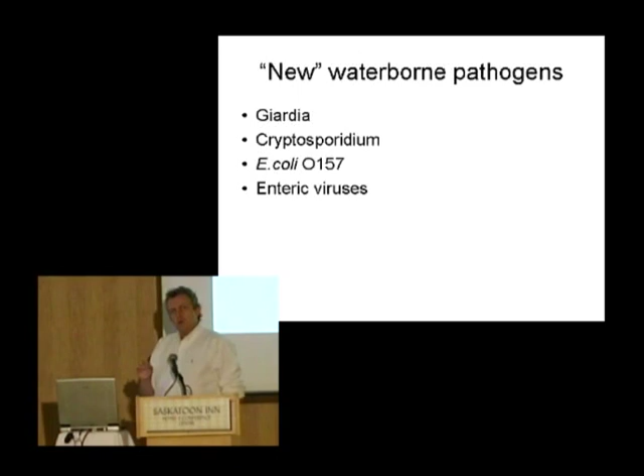And trying to find methods of treating drinking water targeted at specific organisms is a crazy idea. It makes no sense at all. Hopefully, by the end of this presentation, you'll have a bit more of an idea why I'm saying that. But it's true that targeting specific organisms is not a smart way of spending your money. Consequently, monitoring for specific organisms is not a good investment, generally.

We're all familiar with the concept of indicator organisms. This concept goes back a long way, to when doing any kind of microbiology on water was pretty difficult. The idea was to pick a group of organisms, or preferably a single organism, that can be used to indicate the potential presence of enteric pathogens. When this concept was developed, the enteric pathogens we were talking about were things like Vibrio cholerae, Shigella, and Salmonella.

And initially it was coliforms. They were the initial indicator organisms. Well, I guess in truth, initially it was just total bacteria, but that's not a very good indicator. And then we moved to coliforms, which are also not a particularly good indicator of fecal contamination.

So some smart cookie came up with the concept of a subset of coliforms known as fecal coliforms. Well, by the end, or a little way further into this presentation, you'll probably get the impression that I don't really agree with the concept of fecal coliforms, because there is only one fecal coliform, and that's E. coli. And that's a specific organism, very well defined, both in the way that it behaves when you grow it, but also genetically.

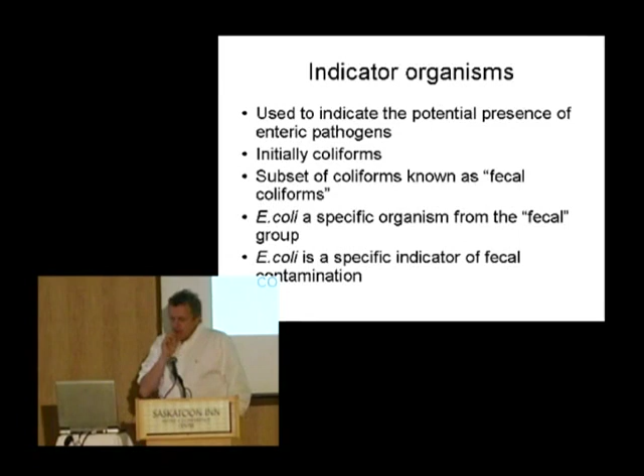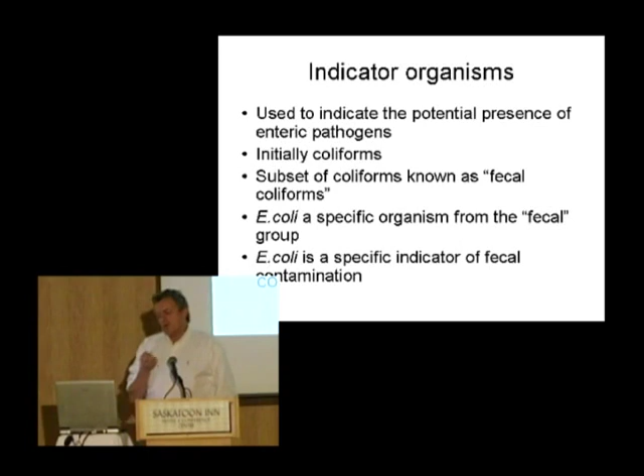And E. coli is a specific indicator of fecal contamination, and it's the only one that we can readily use that is a specific indicator. There are a couple of other things that you might say, well, you only find those in feces, but they're much, much harder to identify. So bear that in mind, that E. coli is a further subset of that mysterious group known as fecal coliforms.

What are the characteristics of good indicators for fecal contamination? Well, whatever they are, they must be present in all feces. Good news is E. coli certainly is present in all feces. They should be there in greater numbers than pathogens, and that doesn't mean individual by individual, because if somebody has an acute gastrointestinal infection, then the pathogen may actually be more numerous than E. coli. But if you take everybody in this room and collected their feces for a day and then enumerated, you would see that E. coli was more numerous than any pathogens that might be there.

And incidentally, looking around, there's probably 5 or 6 of us that sometime today are going to excrete a pathogen, whether you know about it or not.

Good indicators also should be able to survive for similar or maybe even longer periods of time in water than pathogens. Well, when we look at that for E. coli, it's probably true to say it does for some. For the likes of Salmonella and Shigella, Campylobacter, yes, it does survive for similar periods or longer. The likes of viruses and Cryptosporidium and Giardia, maybe even Vibrio cholera, because one of its natural habitats is water, probably doesn't survive for similar periods. In most cases, it doesn't. And certainly Cryptosporidium will survive for up to a year. E. coli certainly doesn't hang around for that long.

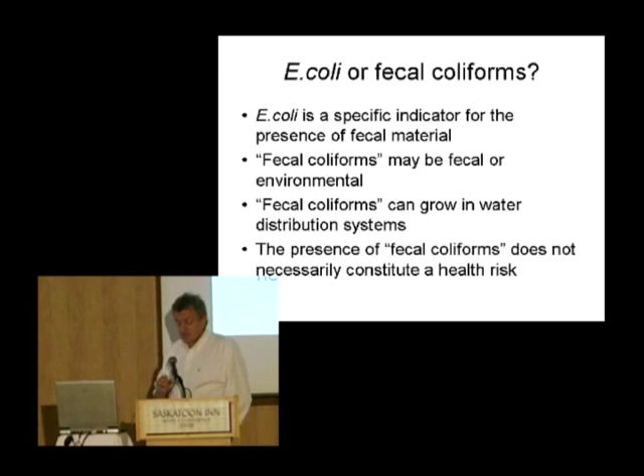But it's not all good news, as these things seldom are. And as I said at the start of this presentation, monitoring for E. coli in treated water is more a regulatory tool than an operational one. When you take your one sample a month or one sample a week, whatever it might be, for testing for coliforms and E. coli, it's an absolute waste of time as far as protecting public health.

When do you take it? What time of the day? You take it at the weekends? No, nobody ever monitors at the weekends because nobody gets sick at the weekends, do they? Plants always work well at the weekend because nobody's there to see that they don't, usually. Why do we test 100 milliliters? You know why? Well, because that was convenient. That was the volume that people could conveniently handle.

If you increase that, as we have been doing in a recent study in Florida, and maybe you take 2 liters, right, so 20 times the amount, you know what? You tend to find coliforms and E. coli more often. So what does that mean? It's there in 2 liters, which is supposedly, if you believe this, you believe anything, but supposedly you all drink 2 liters of tap water a day. I don't know too many people that do, but those are the figures that are used for risk assessment and such like that. Everybody drinks 2 liters a day.

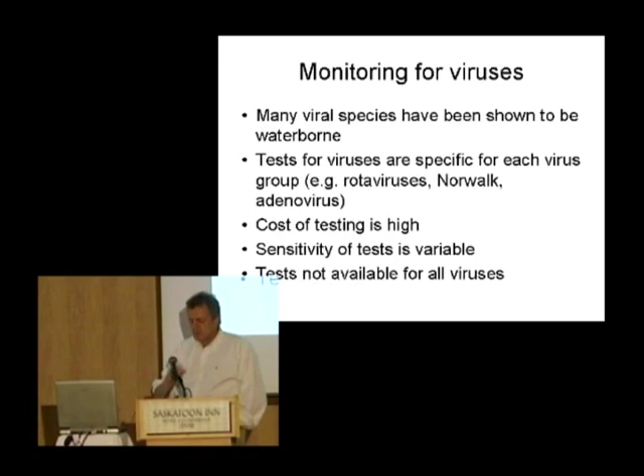The other point is that there aren't tests for all the viruses. So you can only test for a certain group, and the others you can't test for anyway. So really, even if you're concerned about viruses, actually testing for them is not going to help you an awful lot. What about protozoa? Well, a lot of people have got rich on protozoa in the last 10 years, that's for sure.

Should we be monitoring for them? Well, if you believe the UK government, you need to monitor every surface water plant that might be at risk every day, a minimum of 22 hours a day. You need to be sampling. If you believe US EPA, well, no, you don't want to do that treated water rubbish, but you need to sample once a month for 2 years. I don't know what that tells you either. It tells you 24 snapshots, you've got Cryptosporidium there or you haven't.

And we know these bugs occur in clumps. So they'll come through at high numbers for a short period of time, then there'll be nothing. So routine monitoring generally is not recommended, apart from by a few regulatory authorities that really are recommending things that are pretty dumb. Tests are expensive. What would you pay typically? Probably 500 Canadian, something like that, for a single test.

And yet again, recovery efficiency is variable and often poor. What that means is sometimes you might get an answer saying there's nothing there. Well, the reason there's nothing there is because the lab wouldn't have recovered them if they were there, because the test is quite difficult to do. How variable? Well, there's a lab in the US that probably would like to think it's the best protozoan lab in the country, maybe in the world. Knowing the owner, probably she thinks that.

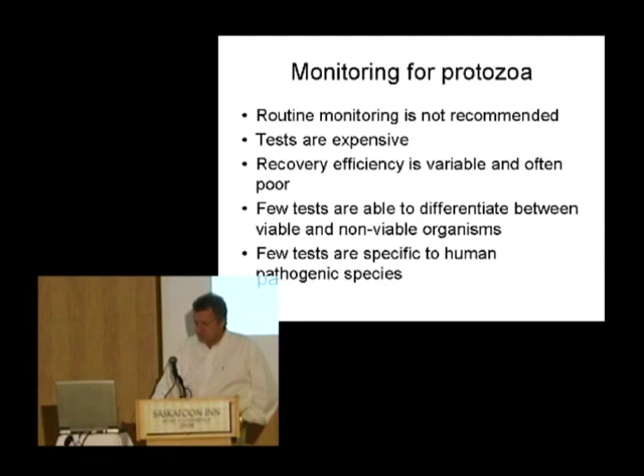Well, I can tell you that if you monitor finished drinking water at virtually every drinking water plant in the country, with possible exception of membrane-based plants, if you monitor the finished drinking water for dead crypto, you'll find them. So do you want to know about dead crypto? Not really. But if you do, $500 a shot, and I'll be happy to arrange it for you, for a commission.

So catchment assessment generally is the first step in assessing that threat. And for some catchments, not many, especially these days, it's pretty easy because you can assess the catchment and say, nah, there's no threat. The only time that you can do that is if you have either a completely secure groundwater and you can be guaranteed it's going to remain that way, then you're not going to have a crypto problem. Or if all of your water is from a desalination plant. Other than that, you will have some threat based on your risk assessment.

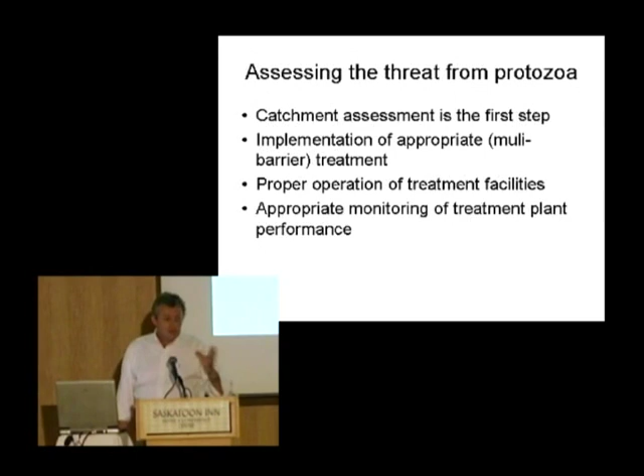Once you've got them, great treatment plants, there's lots of them out there, fantastic. Don't they look good? Cost millions of dollars to build. Not much good if you don't operate them properly. You can have all the technology you like, but if you don't actually monitor that it's working and adjust it when you need to, you may as well just drink the river water. The biggest cause of waterborne disease is improper operation of treatment facilities. No doubt about it. And there is waterborne disease going on every day in virtually every community. We may not see the massive outbreaks like Milwaukee, but sporadic waterborne disease occurs every day in virtually every community.

So now you've understood what the risks are in your raw water. You've got millions of dollars invested in treatment technologies, and you're running it properly. Then you need appropriate monitoring to demonstrate that you're running it properly. Now I'll go back to testing for E. coli or coliforms or fecal coliforms in treated water. That was the initial attempt by sanitary engineers to check whether the person operating that facility is disinfecting the water enough, because it wasn't easy like it is today to monitor chlorine levels constantly. So they used a bacterial indicator system.

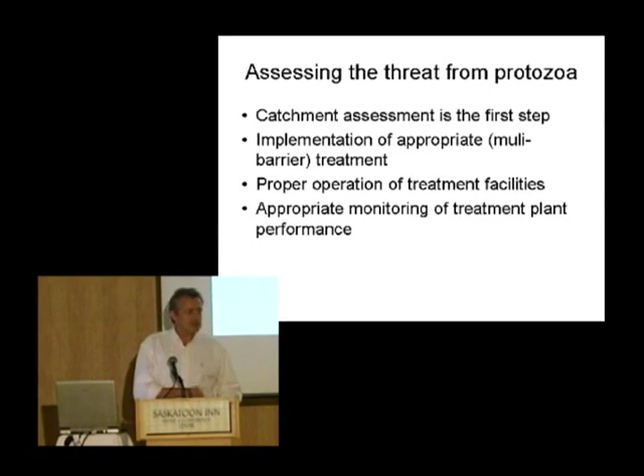Nowadays, you don't need to do that. Everything's online. You can do it all instantly. Do you want to know that you drank water yesterday that was contaminated and you're going to get sick tomorrow? Nah. Much rather know that what I'm going to drink has already been tested, and we know that it's been disinfected, and I'm going to be fine. That makes a lot more sense. So appropriate monitoring means online monitoring, wherever possible. And when it's not possible, you may have to do a few manual tests, but do ones that take minutes rather than days. Nobody wants to know the reason why they got sick. They want to know that they're not going to get sick. So appropriate monitoring is what you need.

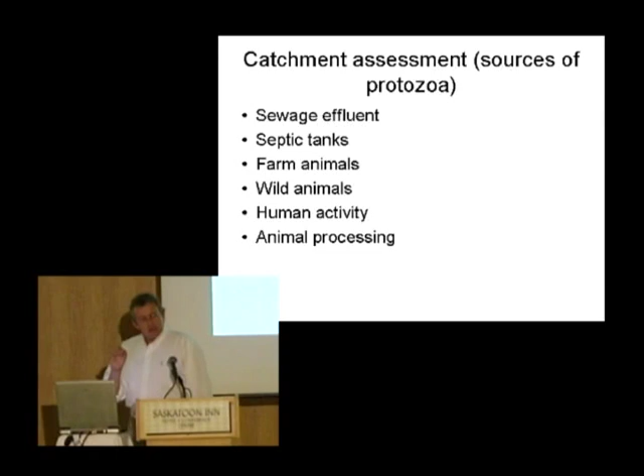Catchment assessments. Well, who's got a surface water plant that one of these doesn't impact on? I don't know of any. You've either got sewage effluent or septic tanks or farming. And if you haven't got farming, you've got wild animals, and then maybe you've got some degree of human activity, even if there's not a lot. It takes one sick person, by the way, to be in a catchment. And if they're sick, sometimes when you've got to go, you've got to go. And that's 10 to the 9, 10 to the 10 crypto. That's a lot of crypto to get rid of.

So any surface water catchment that I've ever seen has at least one of these things going on, which means you've got a risk. Now, the more of those that you have and the size of those will affect the severity of that risk. So if you've got sewage treatment plants and septic tanks and farming going on, you've got a huge risk.

And I'm glad to see that Canada's actually beginning to put out a call for proposals to try and develop something that will look at this kind of stuff, not just for drinking water, but for recreational water as well, and agricultural water. And it's encouraging to see. It'll be even more encouraging if they give me the money to do it, but it's encouraging that they are going down that road, saying, well, assessing what's in your catchment is really important. And believe me, it is, because if you don't do that, you don't know how big the risk is, and you don't know how much you need to spend, and where to target the limited resources that everybody has.

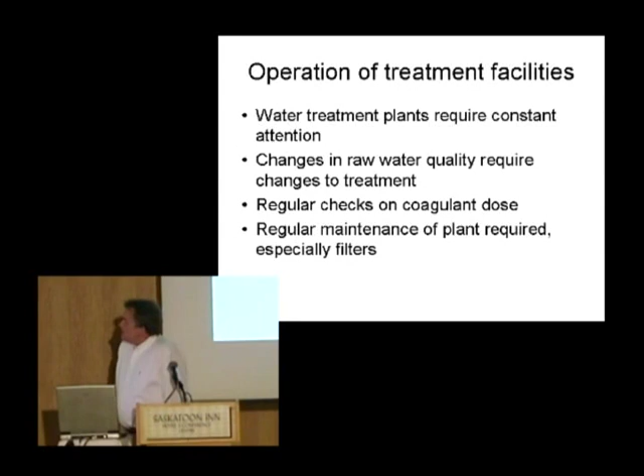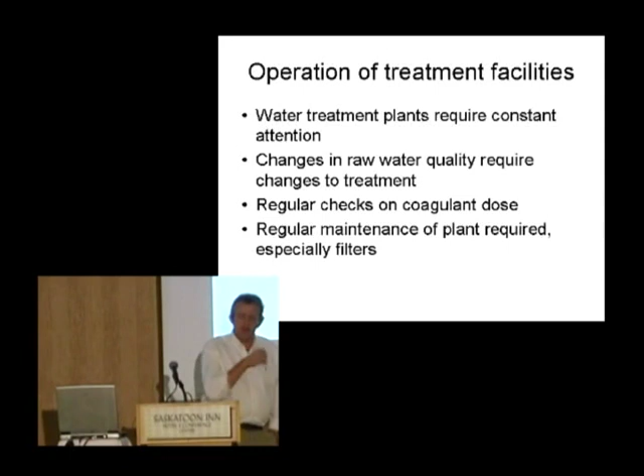What about operating them then? Well, you know what? Isn't it amazing how water treatment plants, most of them, they're manned from like 8 in the morning till 5 or 6 in the afternoon. And then everyone goes home and they operate perfectly for the other 14 hours, don't they? Hopefully. Well, reality is that most of the problems that occur, that develop into water quality incidents, occur outside of that 8 to 6 working day period.

Water treatment plants require constant attention, and the bigger and more complex the treatment plant, the more attention it needs. No question. But there's very few water treatment plants that are actually manned 24 hours a day, and probably rightly so. But there are things you can do at least to alert somebody that your treatment plant is failing. It's no good going in at 8 in the morning and finding that since you left at 6 o'clock the previous day, you've just been pumping out raw water for potable purposes. They do require constant attention.

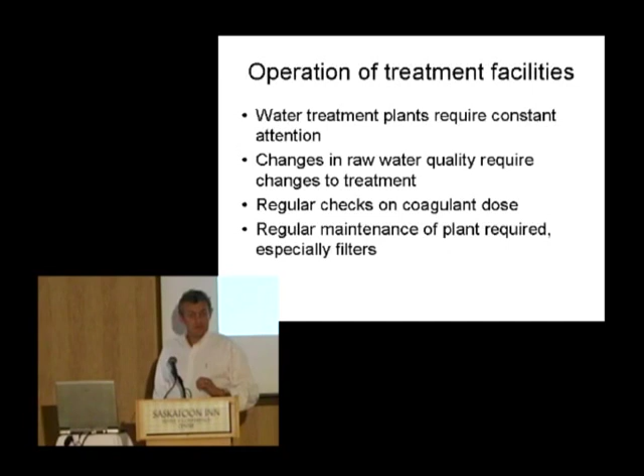What if the raw water changes? Often does. Doesn't need much of a change. Might be a turbidity change, might be an alkalinity change. Anything that makes the treatment of that water or the treatability of that water change is important. If the raw water changes in any way, you need to change the way you're treating it. How do you know that if you're not monitoring what's going on in the raw water? Tough one if you're not there. Very tough one.

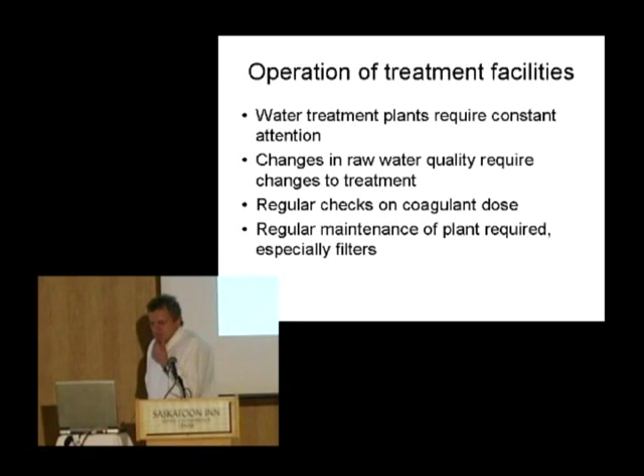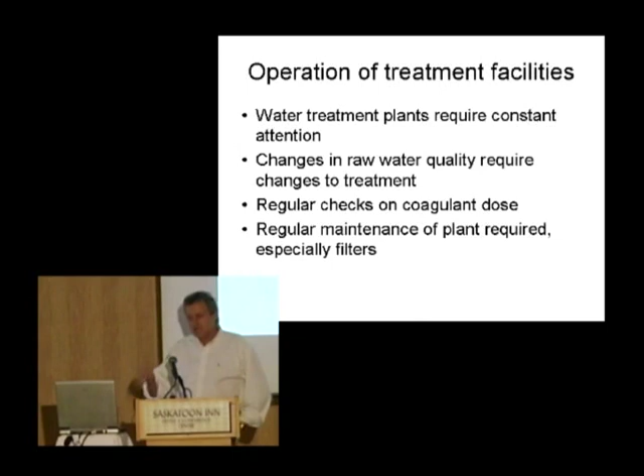You have coagulation going on in your treatment plant. How often do you check that you've got the right coagulant dose? Years ago I worked for Thames Water. It's the third largest water company in the world. And when I was auditing some of their plants, it's like, well, what coagulant dose do you use? And they have one coagulant dose that they use for 6 months, and then it changes for 6 months. On October the 1st, we change the coagulant dose to this, and it'll always work. Crazy. The coagulant dose you need varies maybe daily, depending on what your water source is. You need to do regular checks on what coagulant dose you need.

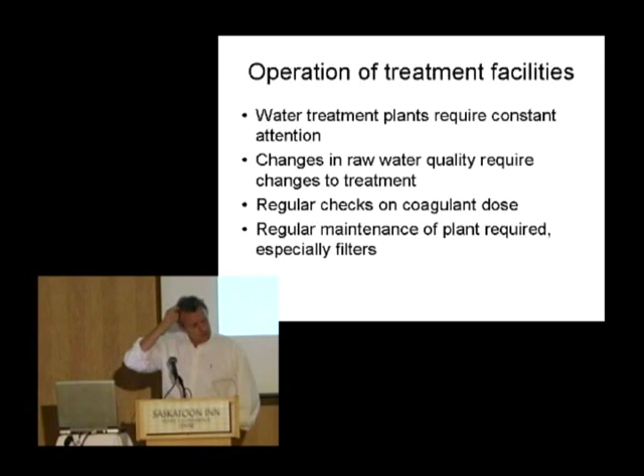What about the filters? Oh, well, we backwash them every 24 hours, whether they need it or not. That's the normal. Well, what if they need it at 18? Well, we do it at 24, because that's efficient, or it's cheaper. Yeah, and people might get sick. How often you backwash your filters depends on how good your filtration is actually working, depends on how good your coagulant is working, depends on your raw water quality, it depends on a whole bunch of things. So to say we do it every 24 hours, mad.

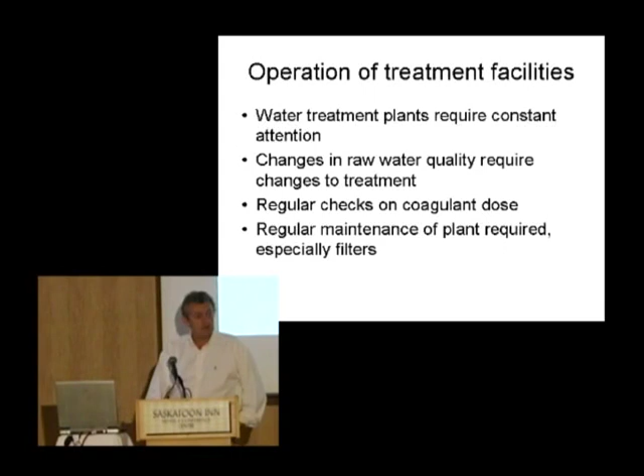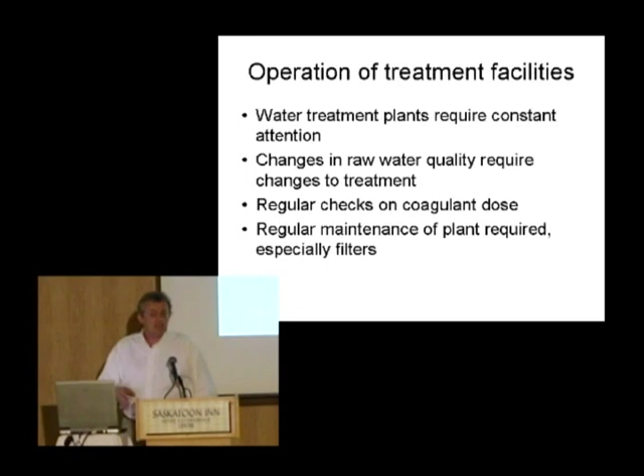It's nuts. Absolutely nuts. But that's what most people do. They don't measure head loss or how efficiently that filter's working. It's just like, well, we'll do it every 24 hours. Or if we can save a bit of money, we'll do it every 36, actually, because it's cheaper. Bad. So you need to check each of the processes all the time, as often as you can. You need to know about your raw water quality. What's the turbidity like? What's the alkalinity like? Who measures alkalinity in raw water? Well, anyone that's doing coagulation ought to be, but they don't generally.

What's the pH like? Just what does it look like? Sometimes you talk to operators of treatment plants and they just look at the water and say, this is going to need such and such, and they're right. Because they know from experience that when the water goes to this color or has this particular characteristic, it needs this type of treatment. You need to look at what you're treating and treat it appropriately. Do jar tests for coagulant dose. They're not so tricky. They're pretty easy.

What about filter performance? Well, that's always an interesting one. Don't just measure what's going out. Now, I know in most situations we're talking about small treatment plants here, but large treatment plant, multiple filters, and they measure the turbidity of water going out to the community. Doesn't tell you anything, because if you've got 16 filters, you might have 15 that are doing great and one that's not working at all. You won't notice it if you only measure the final turbidity. So measure the individual filter performance. And don't just measure turbidity either, measure turbidity removal.

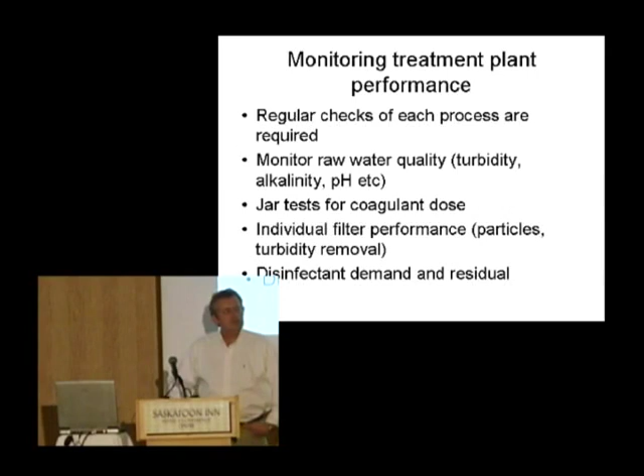And we all measure disinfectant residual. Yep, got to be there. How about measuring disinfectant demand? How many people actually do that? Not too many. Very important. If you don't do it, you don't understand what's hitting your disinfection system, and then you don't understand how well your disinfectant is working. You also don't understand how long it's going to last, or whether you've got all kinds of bugs in there that are being protected by particulates and organics.

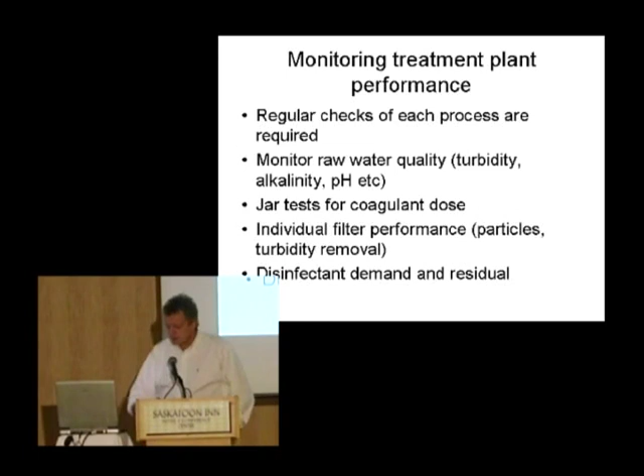Better get moving, I'm running out of time here.

Developing criteria for monitoring treatment plant performance. Well, it's got to be based on risk assessment, and you prioritize your risks to public health. So what are our major risks based on our raw water and the community we're serving, et cetera, and that's where you start. You've got to develop surrogate criteria for monitoring treatment plant performance, and that's what I was saying. You test real time wherever you can, or quick tests, not wait 2 or 3 days for a lab analysis. That doesn't help. So it's got to be real time wherever you can.

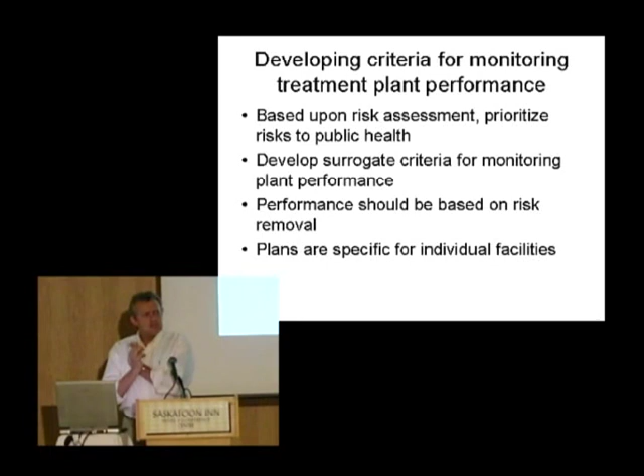And imagine cryptosporidium. You're gonna wait for a cryptosporidium result to know whether you've removed it? Well, ask that to anybody that's had a transplant or has got HIV or is in any way immunocompromised. They want to wait 3 days before they can drink that water? No, they want to know that you've treated it properly.

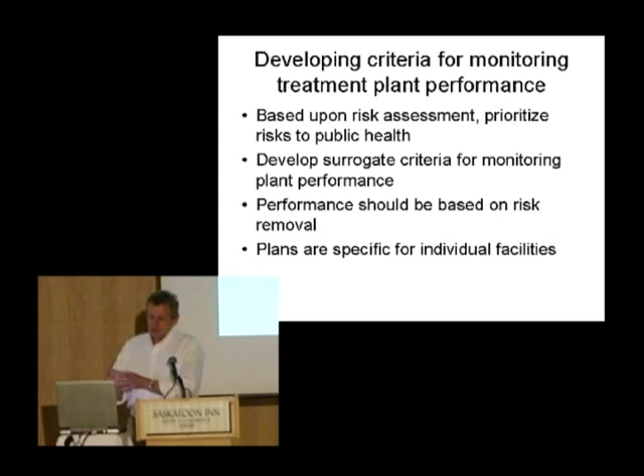The performance of your treatment plant, you should base it on risk removal. You know what the risks are. That's why I said you need to put as much effort as you can into determining the risks and quantifying them. And then you can measure your treatment plant performance based on the risk removal. And you know what? If you look after more than one plant, you've got to do it all over again because the plans are specific for individual treatment plants.

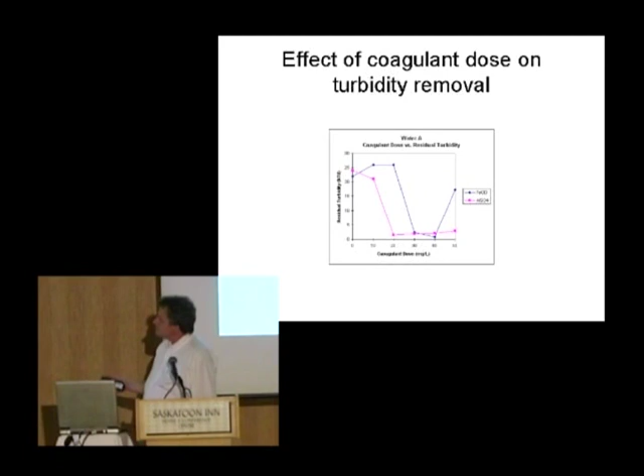And one of the points that most people fail to recognize is that too much coagulant can be almost as big a problem as too little. So you want to get it right. Use the right amount and the right type of coagulant. You know, ferric doesn't work for everybody. Alum doesn't work for everybody. Poly doesn't work for everybody. You've got to choose what's going to work best for you.

Let's talk about Sydney, because I enjoyed my time down there. 4.5 months in Sydney, investigating what they did wrong. It took about 4.5 minutes, actually, out of the 4.5 months. But they paid the company I was working for about $500,000 for me to do it, so I guess that was a pretty good rate for 4.5 minutes.

Just a little bit of background. Prospect Water Treatment Plant supplies water to 3 million people. It's run by a French organisation, not that I've got anything against them, but they're private, and their primary concern is making money. They have a raw water storage facility which, when it's full, stores enough water for Sydney's demand for 7 years. Now, on the basis of that, they made a pretty dumb assumption. That was, well, we've got all that water in there, so it's going to be consistent water quality. It's reasonable to think that if you understand everything about what's going on in that storage, and they clearly didn't. But we'll get to that in a minute.

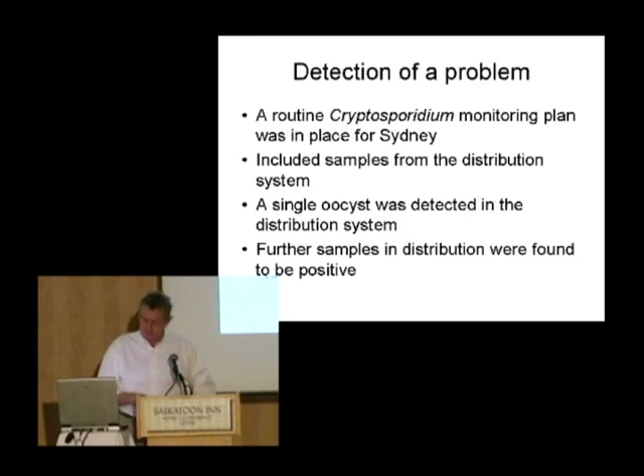They found a single oocyst, and then they said, we better sample a bit more, so they sampled a bit more and they found some more. Not too surprising. And eventually they got to a position where they found out it was the treatment plant. But actually it was a real coincidence that it happened. You know, they could have found that oocyst at any other time and it wouldn't have been a genuine problem. But as luck would have it, that's what happened.

So Prospect Water Treatment Plant, as I said, run by external contractors, and during the time that we were finding like one oocyst per litre or a few in every 10 litres at least, the contractor said the treatment plant's performing normally and within specification. The final water turbidity, this is the one at the end where it's all mixed, every filter, less than 0.1. It's 0.5 coming in, but it's all performing really well. No coliforms or E. coli, so the chlorine's okay. But they did have some maintenance underway on the final water tanks.

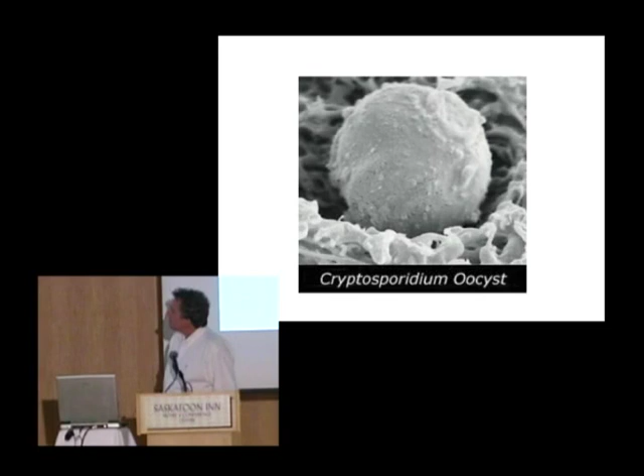And this is the beast. Microbiologists can never resist putting these things in, can they? But this is the beast that caused the problem. This is an EM of a Cryptosporidium oocyst. That's the thing that all that money's been wasted on.

So what happened in the first event? We found parasites in the distribution system. And despite the fact the contractor said everything's been going just fine, we've been supplying water to you that's just perfect, all within specification, except they lost coagulation four times during a five-day period. It's not such a big problem if you've got a conventional treatment plant. It's a huge problem if you've got inline filtration, direct filtration like this is. Because what that means is if you lose coagulation, you're actually putting raw water onto your filters.

What happens then? Well, because you're not coagulating, you've got lots of small particles. And that beast that we just looked at is a small particle. It's 5 microns. So the filters may have been working great for 18 hours, taking out all those crypto, they're all stuck in the sand, and then suddenly you hit it with raw water, and it has a lot of 5 micron particles in, strangely enough. And when you put 5 micron particles on the top, what you push out the bottom is 5 micron particles. So as soon as you lose coagulation, all those crypto that you've taken out for the last however many hours just get pushed straight through and into distribution, and people get to drink them.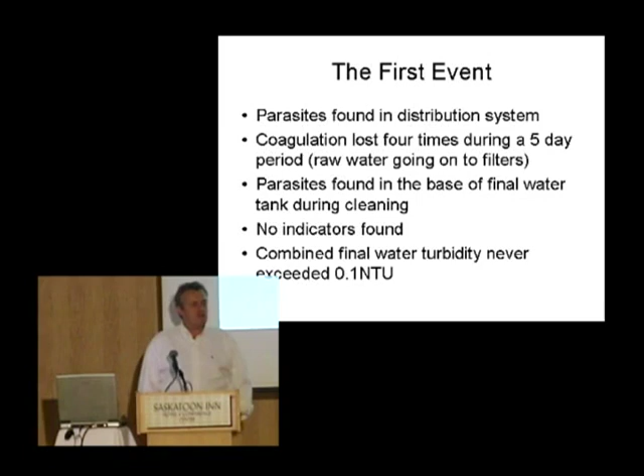So if you lose coagulation on a direct filtration plant, your one and only barrier has just gone. Not only has it gone, but all the ones that you've taken out for the last however many hours, you decide you're going to give those to people for free. So single barrier, for 3 million people, you're going to have a plant with single barriers? No, madness. It's madness if it's 30 people. But for 3 million, it's complete insanity.

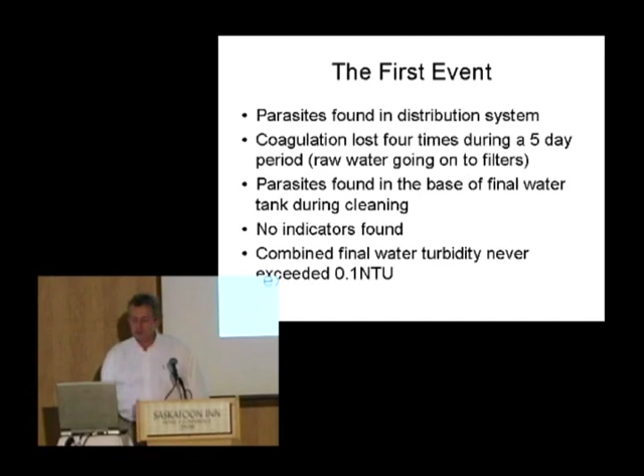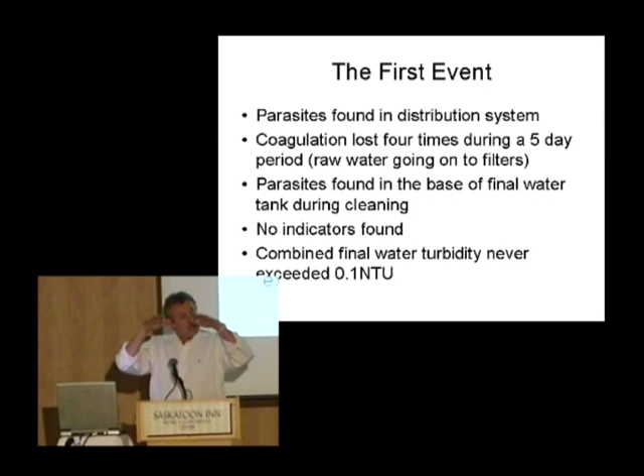However, what else happened? There were parasites in the bottom of the final water tank during cleaning. Well, do you know how they got there? Because they didn't bother to look at their coagulation. And if you don't look at whether you're adding the right amount of coagulant, what happens is you get secondary coagulation. So after you've coagulated, it goes through the filters, you've still got the chemicals there, then you go into holding tanks before that stuff goes out, and the coagulant carries on working, and it will take out some more particles. And it did, and it does, and in those particles were a bunch of crypto and giardia.

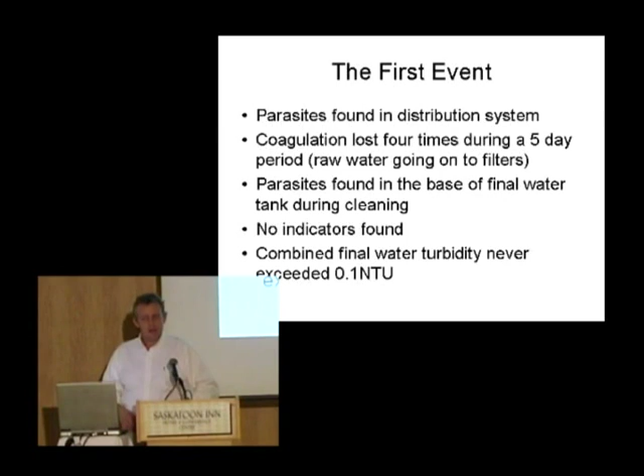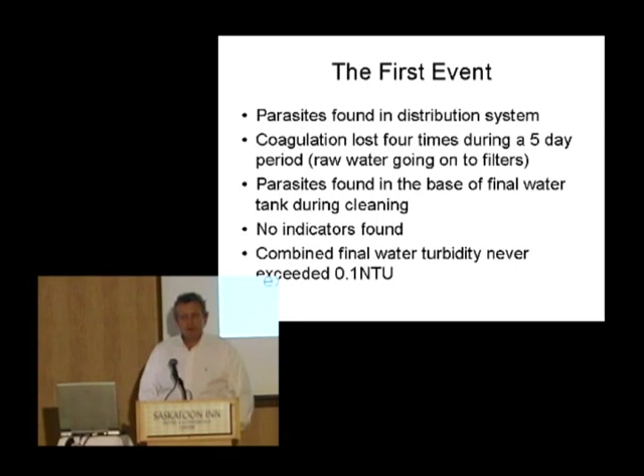When they cleaned that tank out, they washed a load of that stuff straight into distribution. Still didn't find any indicators, and still the final water turbidity was less than 0.1. Not much real satisfaction for people that got sick when you say, yeah, but everything was okay.

And believe me, by the way, maybe those of you that are familiar with Sydney will say nobody got sick, and it was a laboratory stuff-up. That's the classic that one particular person in the US comes up with, who wasn't even there, incidentally, for 90% of the time. People did get sick, and it wasn't a laboratory stuff-up. Let's be clear about that.

So, what happens with coagulant loss? Loss of coagulant can occur very rapidly due to relatively small changes in raw water quality. It does. As I've said, direct filtration relies almost exclusively on good coagulation performance, and if you lose coagulation, you push everything, all the smaller particles in your filters, straight through. Not a good scene. If your filters are working well, they've captured all the crypto and giardia. You lose coagulant, push them straight through.

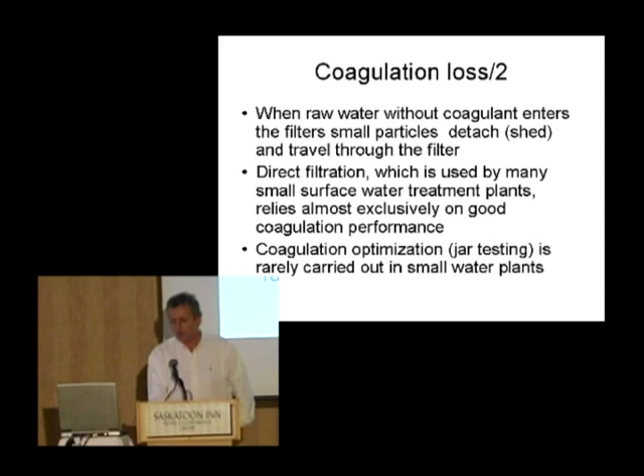I'll say again that it's reliant on good coagulant performance, and therefore you must optimize coagulation. You know, these dumb ideas of, do I change it every month or every 6 weeks or every week even? It's not good enough. Unless your raw water source is really consistent, that's not good enough.

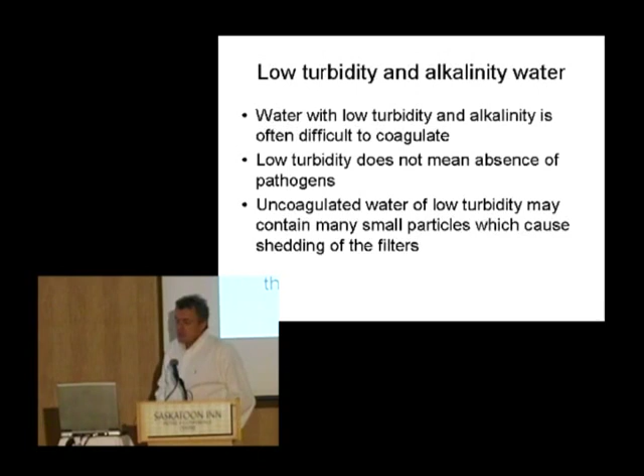What happened in the second event? Well, that reservoir that I told you could contain 7 years' worth of water for Sydney was half full. And then it rained. And it filled up in 7 days. Filled to overflowing. So there was a heap of rain. It was wet. And the water entering the reservoir was colder than the water that was already in the res. So it was denser. So when it flows in, it just goes to the bottom.

They'd had like 5 years of drought or something in Sydney, so it washed off all this wild animal fecal material, sewage sludge that had been sprayed in the catchment, all kinds of stuff, down into the rivers, carried along into the res, dense, hits the bottom, goes along, hits the wall at the far end and goes up to the abstraction point, and you've just taken out this nice cryptosporidium soup, which had low turbidity and very low alkalinity, because it's rainwater mostly, and huge numbers of crypto and giardia in it, huge numbers.

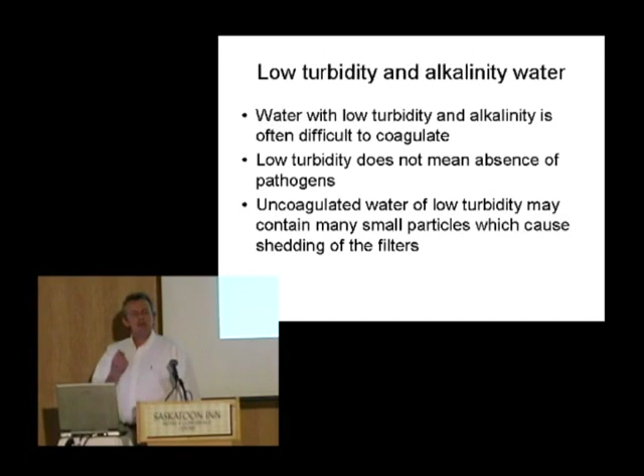And you know what? Those huge numbers were pretty much the same coming into the plant as they were going out of the plant. Very little difference. Why is that? Because they couldn't coagulate it. Didn't matter because it was low turbidity. So they said, well, it's good quality water going on the filters. Doesn't matter if it's not coagulated that well. We don't care. We're still getting paid. Low turbidity does not mean there aren't any parasites there, whether it's in raw or treated water.

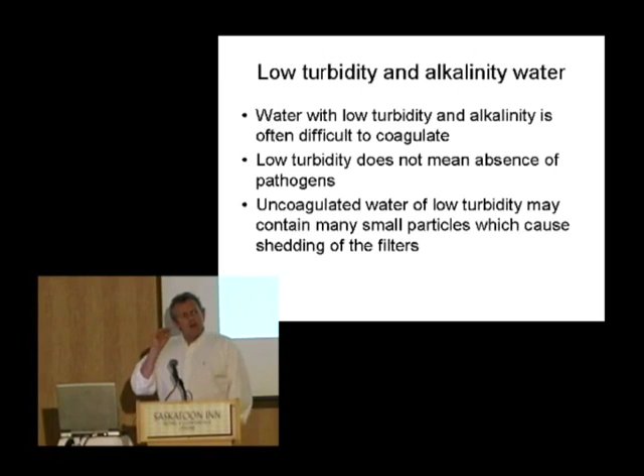Okay, so raw water, people have this strange idea that if raw water has high turbidity, then it's got bugs in it, and if it's got low turbidity, it doesn't have bugs in it. Not true. Clear, low turbidity waters can often have much higher microbial loads than dirty waters. Depends on what the source is. You can have a heap of bugs.

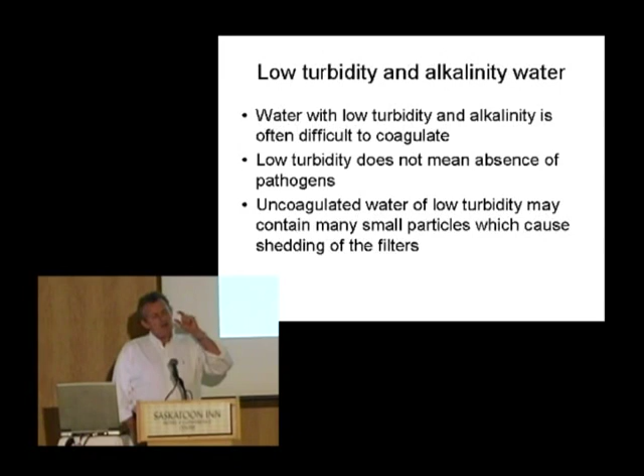Did you know, if you're very good, you can see 10 to the 6, a million bugs per mil. You can just see slight haziness. That's an awful lot of bugs. Do an awful lot of damage with 10 to the 6 crypto, for example. And if it's viruses, well, you can't even see them. So low turbidity, either raw or treated water, doesn't mean no pathogens.

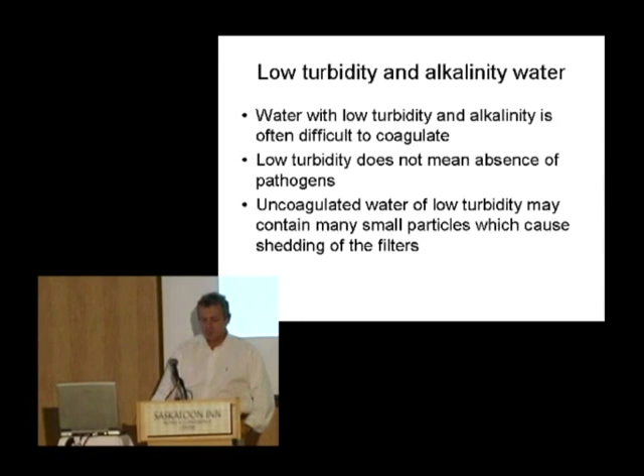And same thing again, uncoagulated water, low turbidity, contains many small particles, cause shedding of the filters. That's what happened, and the bugs just went straight through. Third event, a little bit dodgy, this one. I don't want to say too much about this because I don't really understand it anyway.

But there are 6 plants in Sydney. This one that treats water for 3 million people and 5 others. And they all went positive on the same day, which is a little bit worrying. But during that time, combined filtered water turbidity was less than 0.1, no indicators present, and high numbers of parasites. When I say high numbers, we got up to about 5 per litre on some occasions. That's a lot. Infectious dose is probably 5 or less.

Let's just talk about a few of the assumptions that were made in Sydney that were pretty dumb. 7 years storage of water would result in poor water being diluted or aged before treatment. Yeah, if it all comes in at a steady rate and it's all the same temperature and it all behaves the same way, that's what will happen. When it absolutely pours with rain in winter, the water's cold, doesn't happen.

Large storages result in consistent raw water quality. Well, since then, they've spent about $20 million putting in baffles to actually stir the water up so that you get mixing. You don't get a thermocline. Because large storage doesn't result in consistent raw water quality, not unless you artificially mix.

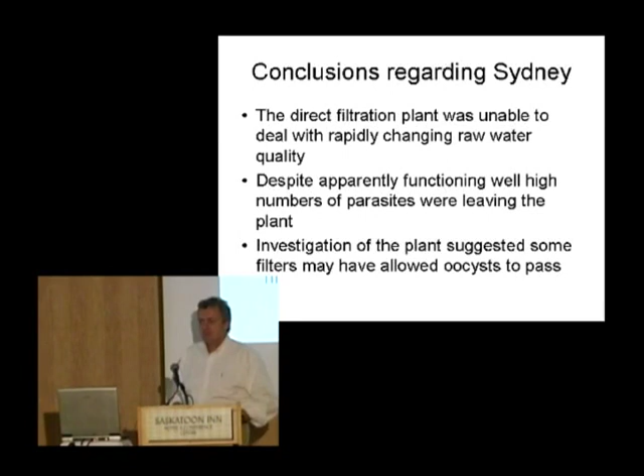And investigation of the plant suggested some filters allowed oocysts to pass. Well, yeah, if you're not coagulating the water, you're going to. The turbidity might still be low because you're taking the rocks and the boulders and all the huge stuff out, but 5 micron particles are just going through. These are my opinions about Sydney, by the way. Most of them are in the report of the official inquiry.

In this Florida system that's kept me away from this conference this morning, frequent coliforms detected in water within the distribution system, like 1 in 5 samples going positive. It's a little bit more than the 5% they're allowed within the regulations. Occasional E. coli. They could reduce the occurrence of coliforms by flushing. Interestingly, coliforms were there even when the disinfectant residual was high. It's quite typical of a biofilm. And after flushing, the bugs reappeared.

Where'd they come from? Well, the water has a high temperature, high organic load, and has a long residence time in the distribution system, like 8 days or something. Perfect conditions for bugs to grow, basically. And the distribution system was apparently colonized with biofilms containing coliforms. As you'll see, it definitely was colonized with biofilms. And as I said, the coliforms were present even when the disinfectant residual was at target levels.

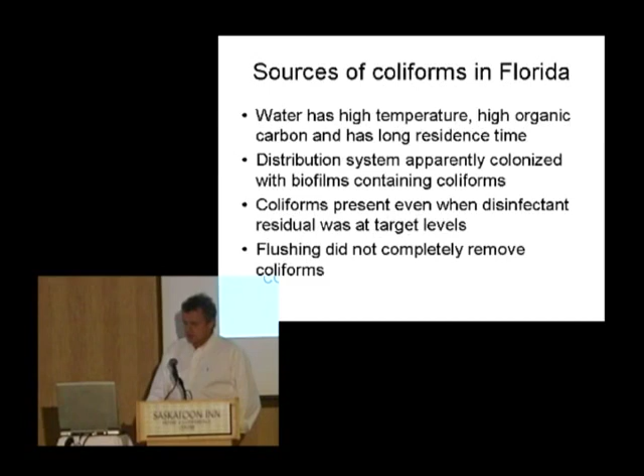I talked before about 100 ml samples versus larger samples. Well, when we looked at the treatment plants supply in this area, if you took 2 litre samples, you know what? We started to find coliforms regularly. Every few days we'd find them. Disinfection criteria at both the surface water plant and the groundwater plants were being met.

There were relatively high numbers of particulates in those waters, particularly, as you will see from the groundwater plant, where there was a hydrogen sulfide removal tower. And organisms were being protected from the disinfectant by those particulates, and the distribution system was constantly being seeded.

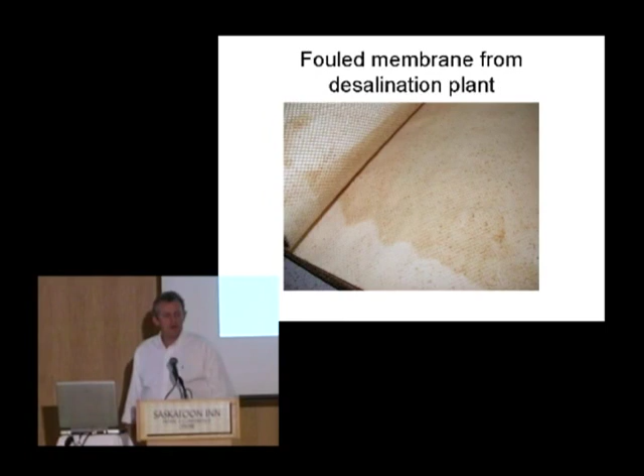There's also a desal plant, and you can see this membrane's nicely fouled here. It's the back side of a desalination membrane, and there's biofilm growing on it. Happens. Any membrane will grow biofilm if you don't clean it frequently enough. It just washes into distribution.

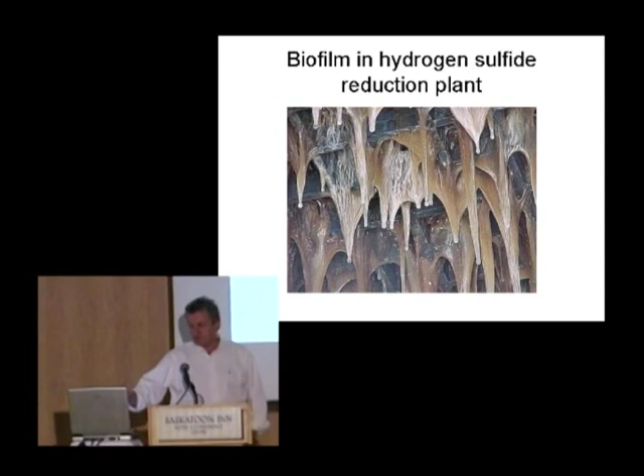How do you resolve that sort of problem? Get rid of the rubbish that's in your water, basically. Get rid of the particulates, reduce the organic load, and cut down the amount of time it hangs around. If it hangs around for 8 days, it's got a lot more chance to grow biofilm than if it hangs around for 4 days. So those are the things that need to be done.

This is why I really put it in about the Florida situation, knowing that you were already going to have a talk on biofilms. These are the lessons to be learned. Monitoring with 100 ml samples does not ensure the absence of coliforms or any other bugs. As I said before, they're for regulatory purposes, and it keeps a bunch of office wallahs in a job, showing that you've got 0, 0, 0, 0 all the time. Negative samples do not mean that the bugs are absent.

And if you want your disinfectant to work properly, then treat the water properly. Get rid of the things you're supposed to be getting rid of, the particulates and the organics. Just a couple of other quick things. Viruses and parasites in groundwater. These are kind of more just a few factual slides rather than my storytelling.

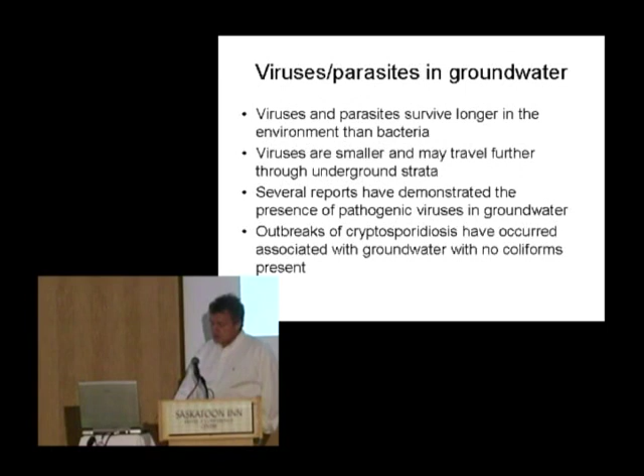Both of these types of bugs survive much longer in the environment than most bacteria, certainly than coliforms and E. coli. Viruses are smaller, so they might travel further. There are heaps of reports now where pathogenic viruses have been found in groundwater in the absence of coliforms, and similarly, most outbreaks of cryptosporidiosis associated with groundwater don't have coliforms present. So, just testing for coliforms doesn't necessarily do it.

If you want to protect your community against microbial threats, well, you can hire me and I can do all these things for you, but that comes kind of expensive, so I'd do it myself if I were you. Firstly, understand the threats to the raw water quality. This is all that stuff I talked to you about before, what's likely to be in there. Try and do it as best you can, quantify it.

Then understand what kind of treatment you've got and what's the capability. Now that's pretty easy to work out. If you've got this many coming in and your treatment's only going to take out this many, then the difference between the two is what's going to go out to the population. Is that acceptable? Usually if you can measure it, the answer is no. If you can measure what's likely to go out, then usually that's not acceptable.

Monitor the performance of your treatment processes. I know I've said this repeatedly during this talk, probably because I believe in it, probably because it works. You need to do it. You need to check constantly that your treatment is actually working. And also make sure you monitor the water quality and distribution.

Going back to that raw water quality, identify the sources of pollution, and if you can stop them, stop them. Do whatever you can with real-time tests to monitor changes in physical characteristics of raw water. Understand what happens when the climate changes, when it rains, when you get snow melt, all that kind of stuff. What does that do to the raw water quality? Low alkalinity, generally, more difficult to coagulate, bit of a tougher job to treat, usually.

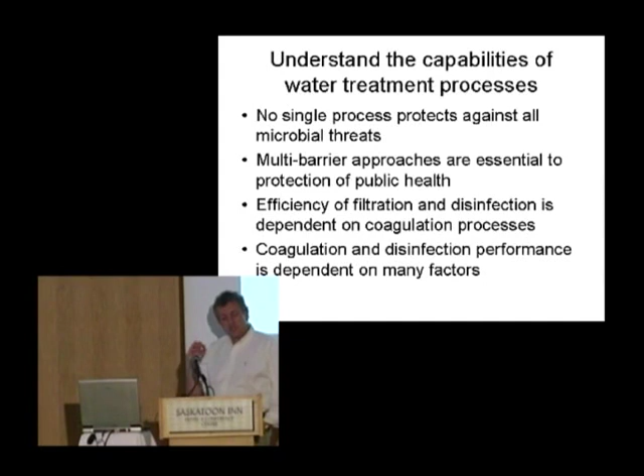And the coagulation and disinfection performance are dependent upon a whole bunch of different factors. So you need to check regularly that it's working. When you're monitoring the treatment processes, check your coagulant dose with jar tests. As I said before, too much coagulant is almost as bad as too little. You must monitor individual filters and monitor disinfection demand as well as disinfectant residual. And I know this is all stuff I've said before, but I'm trying to summarize the main points for you.

Remember this. As soon as you finish treating that water and you put it out in those pipes, the quality starts to deteriorate. And the longer it's out there, the worse it gets. And if you don't treat that water as well as you can, then that deterioration is going to happen faster. Disinfectant residual can disappear real quick for a whole bunch of reasons. Dirty distribution system, infiltration, all sorts of things. Be aware of that. If you get infiltration and you've got low chlorine residual, you could be reintroducing pathogens, and not necessarily only low disinfectant residual, but anything that promotes biological regrowth will lead to poor aesthetic quality.

Last slide, I'm sure you're all glad to hear, and I've overrun my time, but never mind. It means that you can ask me fewer questions.